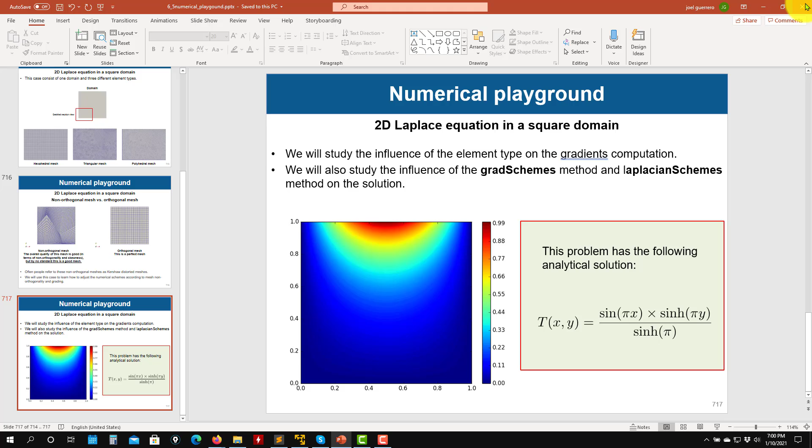So we already have the meshes. We converted them in the previous video; we showed you how to do the conversion. So we're in Laplace cavity. Let's go to the first case, the hexa mesh, the perfect mesh. And here you have the instructions. So open that one, you will see the steps.

You don't need to repeat the mesh, but if you haven't done it, you can do it. So you have it here. Remember, for the mesh, you always go into grid, this directory grid, and run this command, and then go back to run the solver and everything. So just to remind you, the organization is the structure of a case.

So you have this folder, and here you have the boundary conditions. You have here the name of the variables that you are solving. In this case, the solver flubio Poisson solves a variable named T. As you go to Navier-Stokes, you are going to have u, p, k, and whatever. So here you give the boundary conditions.

You have here the header. When you have the exclamation point, it means that this is a comment. So all comments, you can add them like that. And the data structure notation used here is JSON format. If you don't know what that is, just look on the internet, you will find it. But it's a very easy to use format, very easy to understand.

So here you give a name. This is the name coming from the mesh. Whatever mesher you use, how you call those boundary surfaces, that is the name that you get. So we're getting exactly the same names. So if you want to fix a value, remember that in our domain we have this 0 on the walls, bottom, left, right. See that in this case, this is how you set this.

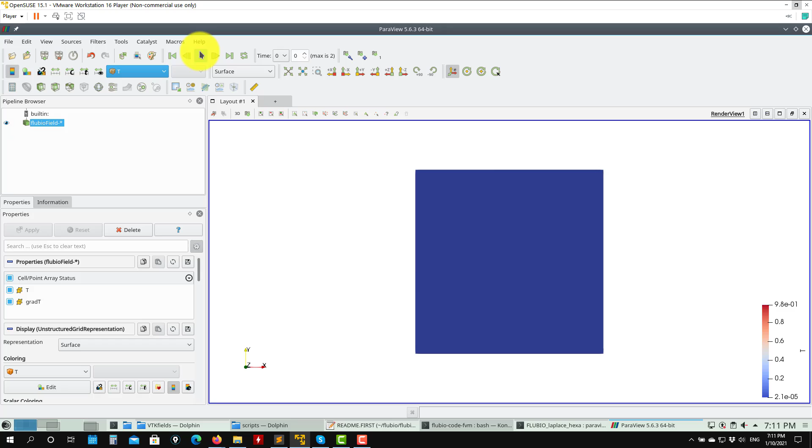Just recall these slides, you will see that this is the field, but then I will show you how to add the analytical solution. As I mentioned, you are saving only the inner cells. If you want to save the boundary patches, you can go like this. You have this command flubio boundary fields. Number of processors 1. You want from, let's say, 0 to 2. Skip field 1, the same idea, minus VTK, and now you give minus boundary.

And you can give a list of all boundaries: left, right, back, front, top, bottom. These are the names coming from the mesh. So if you do this, you are doing the conversion, and now in the VTK fields you have these new VTK files. These are just the boundary fields. So now you can open that, and you have all the information, inner cells and boundary cells.

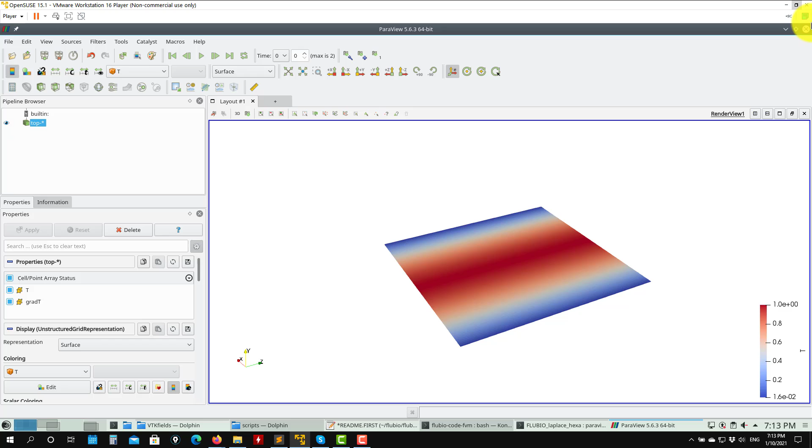So you see, open top, and this is just the top patch. You have it there, and you have the information there. So this is if you need to have the patches. If you don't need those patches, open the internal field. So that's all, this is how we run. So the theory that we're using, everything that you're going to see here in this dictionary, the most important, discretization, is the standard theory of the finite volume method.

Okay, one of the most popular books is the finite volume method. You will have this theory explained there. And just to show you that, here we have the paper. You go there and you are going to have here the references. So this is the preliminary presentation of the solver, but as you go to the references here, see that here you have many papers and many books.

Okay, the theory that we're using is explained in all these references here. So you have all these books. It's a very standard theory, the finite volume method. So let's say from 1 to 12 is the finite volume theory that we're using. This is related to PETSc, the linear solvers. Okay, so this is it.

If you want to clean the case, you have those scripts there. So clean.sh, and I don't want to clean the grid. You have this one also that will clean the grid. I don't want to clean it. So just to show you, for instance, if you forget to input an option, see that I'm commenting gradients.

If you try to run, it will complain. See that it's telling you that this key is not defined, okay? And for instance, if you make a mistake like this, it will tell you that that doesn't exist. These are the options that you have available, okay? So this is how we run this case. Let me rerun again. We're running this case in serial now. Then the next video will be how to run it in parallel.

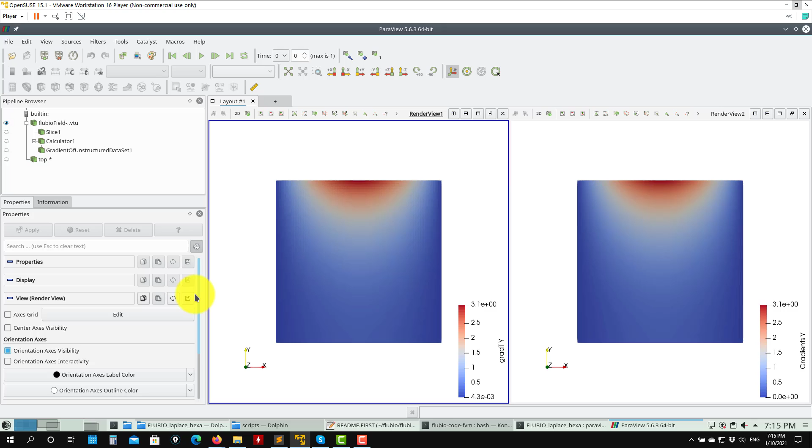So if I go here, load state, here you need to specify the directory. So I want to search in this directory, and it will open, and see that this is already a state that I did in ParaView; you can do all these operations manually. So you see that this is your solution, okay?

So let's look first at T. This is temperature, and this is the analytical solution. So you see that we have a very good agreement. See here that we use the calculator to compute the analytical solution. So we put the equation here, and this is what we're looking at. Now we can compare these two solutions. You can do the subtraction, but see that we have a very good agreement.

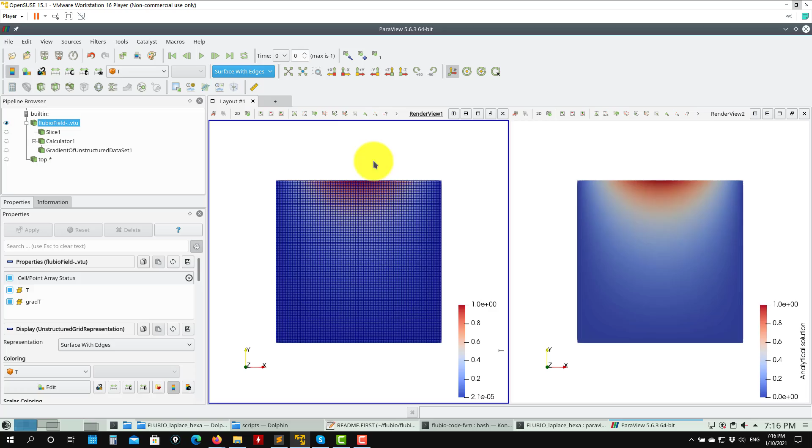So for instance, if you want to see the mesh, you can access that here. Be careful because here we're looking at the volume mesh, so you are plotting all the cells. If you have very large meshes, instead of doing it like this, it's better to put a cut plane, just to visualize the mesh in those cells. So be careful, okay.

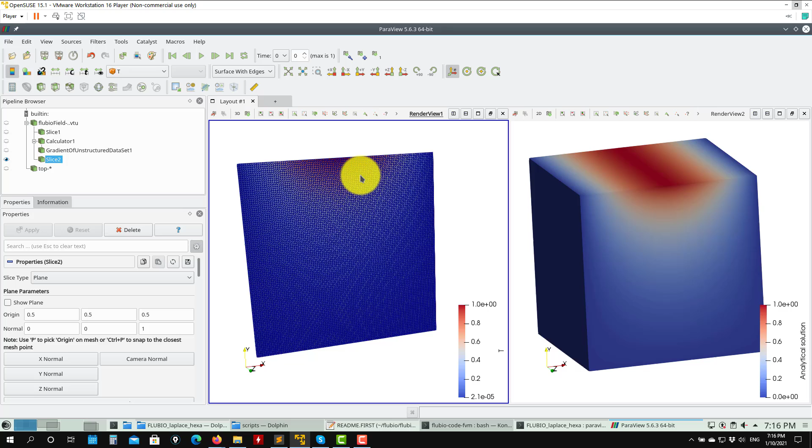Volume mesh, and if you want to see, for instance, the boundary patches, again, come here and post-process VTK fields. I need to convert those patches. We did it previously. So let me convert again all those patches. You have the patch information in ParaView. Let me do it step-by-step manually. If you open the state, ParaView will load everything automatically. Let me show you how to do it manually.

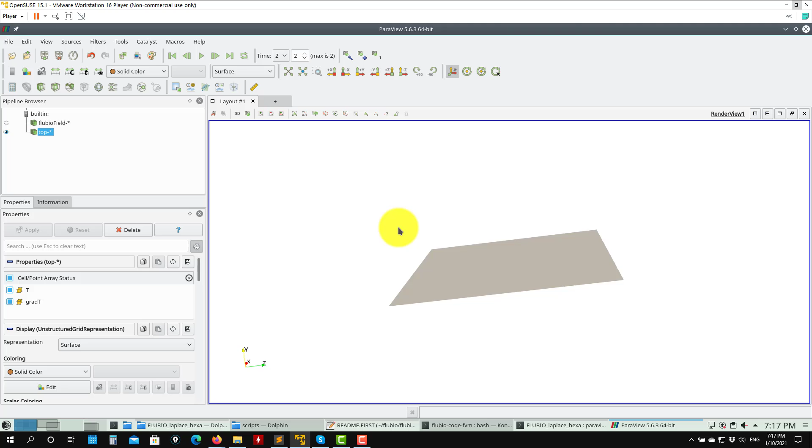So you go here. Flubio fields is the internal mesh. See here that you have your flubio fields; this is the internal mesh. If you want to load, for instance, the top patch, select there, and you will have the top patch. If you want to load the left wall, you have it there. So you can choose everything and you will have the solution. Then you can access the slices, everything there.

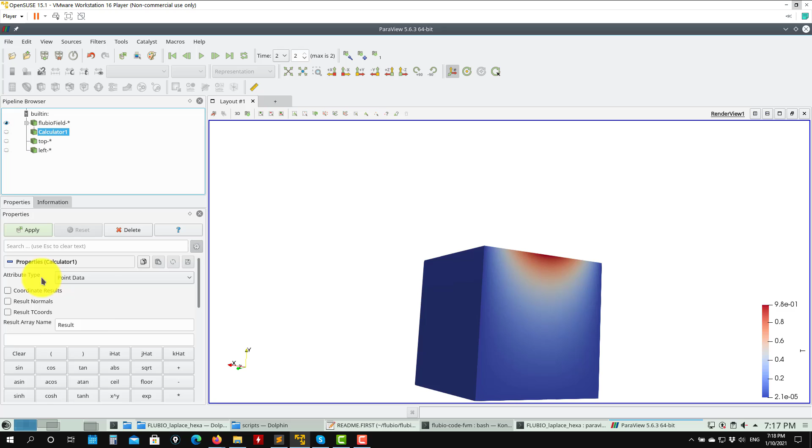And if you want to compute the analytical solution, you go there in your mesh, put the calculator and put the expression there. It's relatively easy. So all the post-processing for the moment we do in ParaView. If you want to sample at a point, a line, everything is done in ParaView. You can also use the Python library accessing VTK, okay?

But it's easier for the moment, as you are a beginner, just to use ParaView to do that. So this is how you run a case. I hope you follow the steps. It's not that difficult. You have to remember you always have these README files with instructions.

So let's move to the tetra meshes, okay? The steps are basically the same. So we go to Laplace tetra and I can run the solver here. I already have the mesh and the setup of the input files. See that it is running now in 4 iterations, okay? So we're in tetra, and here again, what we do is just adjust the numerics according to the mesh that we are using in this case.

So let me open this. See the numerics, we have this method. We're using now 2 non-orthogonal corrections because here it is not a perfectly orthogonal mesh. And what else? Linear solvers, tolerances, everything.

And just to show you something else: in post-processing here, remember you have the binary files with the solution in flubio format after you convert it. So let me erase this one. As you go here, monitors, you have residuals. As you open that file, these are the residuals of the simulation. Then you can go to new plot and plot that information. See that we go logarithmic scale, and here you have scaled residuals and unscaled residuals. It's up to you. Usually it's better to look at the scaled residuals.

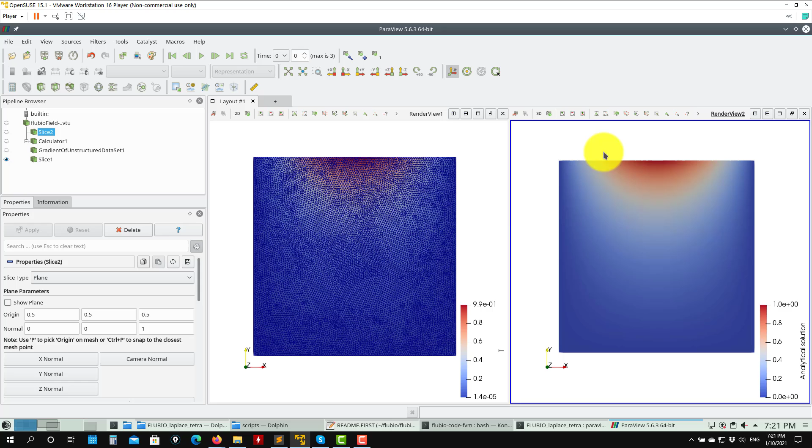Now let me launch ParaView, and I will load the state, this one, to do things automatically. So search in this directory and see that you have here the flubio solution in our tetra mesh. Look here, we're looking at this slice. If you put there the 3D mesh it will be a little bit slow, and this is your analytical solution. Let me erase, and here you can compare the analytical solution and numerical solution. But what is interesting is the gradient.

Now that we don't have an orthogonal mesh, we have non-orthogonality, those triangles you see here, this will influence how you approximate gradients. It's better to look at gradient information. As you look here, gradients, see the numerical gradients, but we also have access to the analytical gradient. This is your analytical gradient. Go here, gradients, and see that you can compare.

So even though we have very good agreement in the T field, when you approximate gradients is where you have problems. This is an important part of the numerics, and this is where we're pushing more now when you look at the discretization dictionary settings. All these corrections, these methods, are different ways to approximate the diffusive term, then you have different methods to compute gradients. And this is a correction that is experimental, just to avoid unbounded gradients. So usually it's more important to look at gradients than at the actual solution.

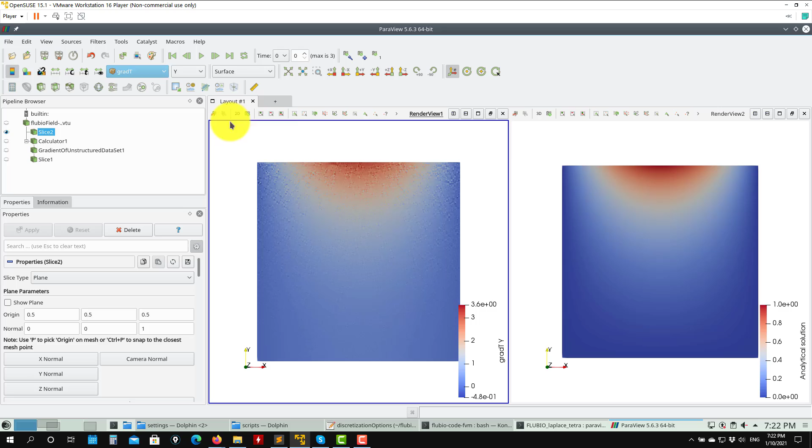So here you can explore everything. Let me go back to the analytical solution here. See that the solution seems to be very, very good, but when we approximate gradients is where we start to have differences. This doesn't mean that this is wrong. This is just the numerics. If you have a better, finer mesh, you will be closer to the analytical solution.

Okay, so this was this case, and let's move to the last case, which is the flubio Laplace Kershaw. This is a type of mesh where you start with an orthogonal mesh, but then you add skewness and non-orthogonalities. To run it is exactly the same, nothing changed. flubio, and see that now it's taking more iterations. See, 12 iterations, and you have minimum and maximum values. So this is the verbosity level. Let me show you. Let me go here and close.

Okay, so always read the README; you have the instructions here, and then the settings there. So when you look at the simulation controls, with verbosity low you see less information on the screen. Here you have it at the maximum level, which is good to have. See that you have all the iterations, non-orthogonal iterations, starting iterations, initial and final residuals.

Okay, so for instance, if you increase the number of non-orthogonal corrections, these are the corrections to improve the approximation of the diffusive fluxes. See that you see all your corrections here.

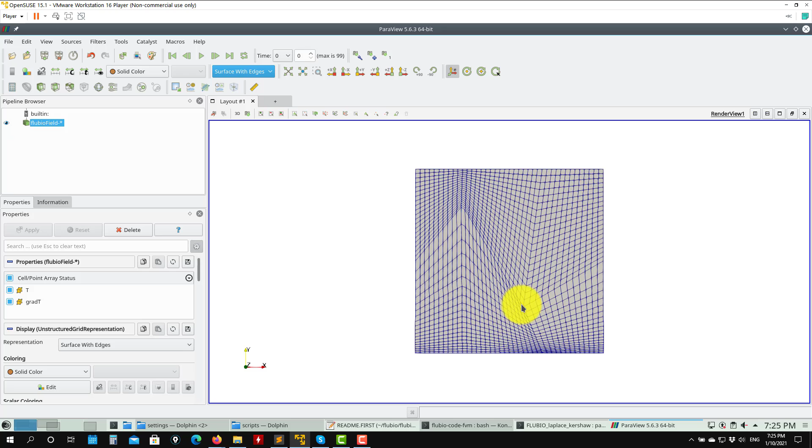So let's see, the problem here is that you now have too large a transition. Here you are mirroring the gradients, but you also have large non-orthogonality and skewness. And this gives problems to numerical methods to approximate those gradients. So there are all these methods, different corrections. Oops, okay, let me open ParaView again. And if I go to postProcessing, here the fields,

see that at the beginning it seems that it's convergent, but now you have problems here where you have the large aspect ratio transition between cells of different dimensions, up to the point that now it diverges and goes out of control.

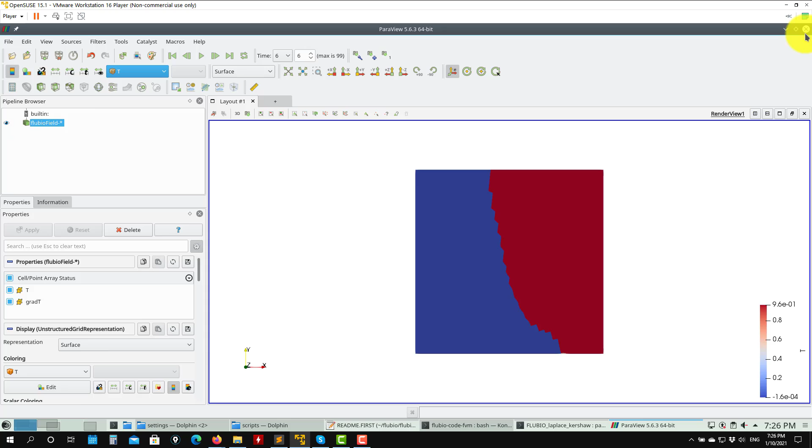So to control that, there are many ways. You can increase the number of non-orthogonal corrections. In this case it will help a little bit, but at the end it will always diverge. See that it's already diverging. Okay, so here you have different methods, but the best method, when you use this one, is the method that works fine.

So we can go here and use this, for the moment experimental, option; you put it to 0. So this is a limiter to avoid that the diffusion term increases too much. And this one helps a lot, but it is not okay. It adds too much diffusion. So be careful, you need to understand first what is going on there. For the moment, we don't recommend you use it; we recommend using the over-relaxed. Then you can also play with different ways to compute the gradients, and so on. So this is how it works.

So let me go here, to the Poisson case. We have a good solution. Let me convert it. First, let me clean, because I already had the previous solution. Oops, okay, no. Sorry, clean, let me run. So we have 12 iterations, so be careful here. Okay, launch ParaView. postProcessing, VTK fields, open there.

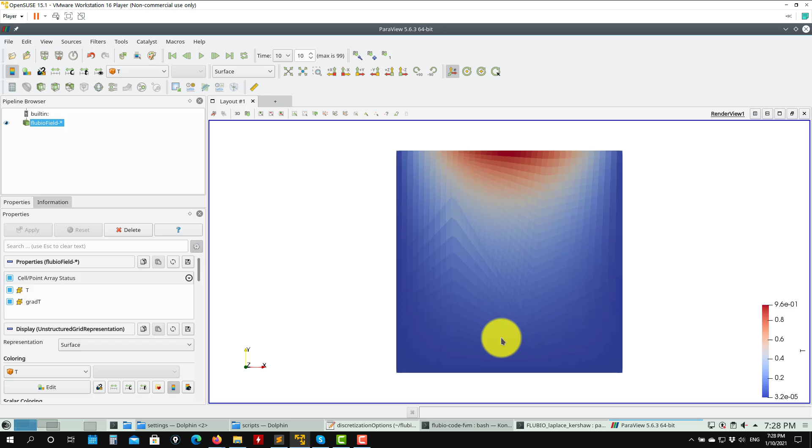And now here you have the solution, and you can go one step at a time and see that now this method is working very well, keeping all the gradients bounded. But there is some diffusion. Just to show you that even in such a simple example, the Poisson equation, which in theory is a smooth operator, if you don't have good quality meshes, you will diverge.

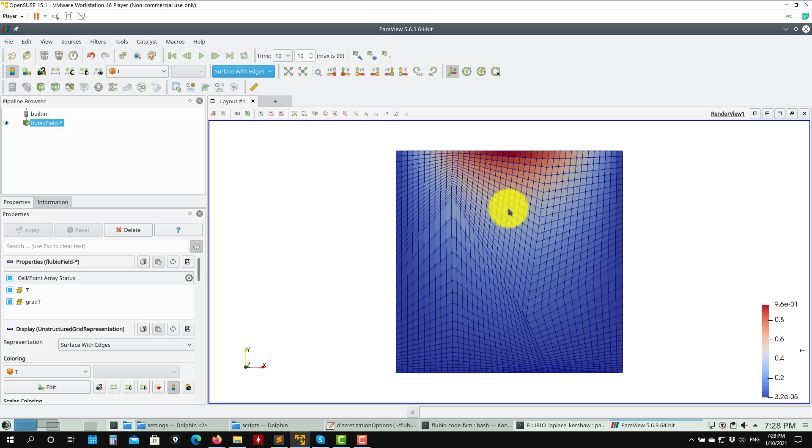But there are also some corrections, some methods that you can access here in your input files. So using the right methods will let you converge, but keep in mind that you are adding numerical diffusion. You can go to the source code and read all the implementation. Remember, this is standard theory. So with this, I think I will stop this first tutorial.

This is the serial one. The next tutorial is exactly the same. I'm just going to focus on the mesh, but just to show you how to run in parallel.